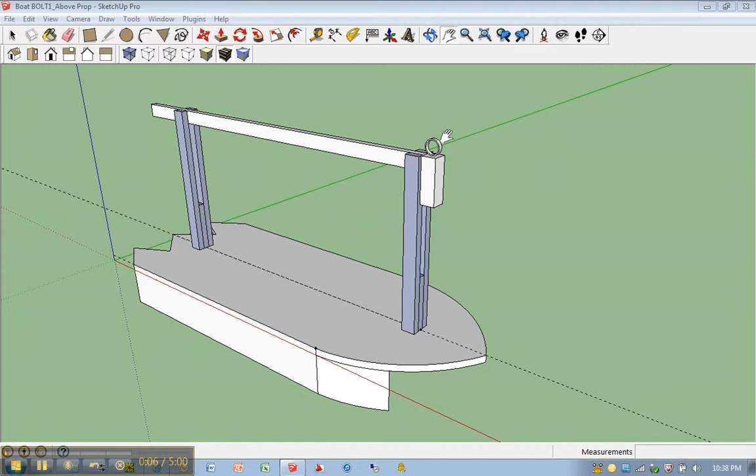Okay, we're going to go ahead and draw the tensioner and rubber band for an above water prop, which is typically one tensioner. So I'm going to go ahead and zoom into this eye hook. You might have to watch this video more than once to follow these first few steps. It's a little funny, a little tricky, but you'll figure it out.

Here we go. I'm going to hit L for line tool, and I'm going to hover along the inner or outer circle, doesn't matter. But I'm going to jump to the middle, find center, and click once.

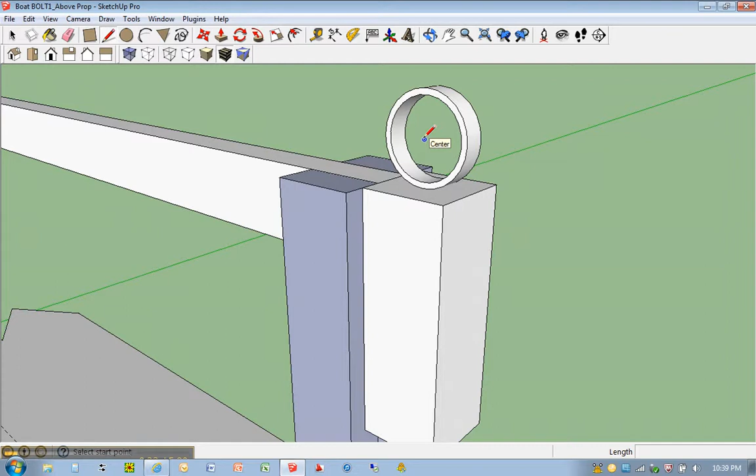Okay, I'm now going to move along the green axis, and I'm going to type in 1 over 16 and hit enter. I'm now going to move away along the green axis and type in 1 over 8.

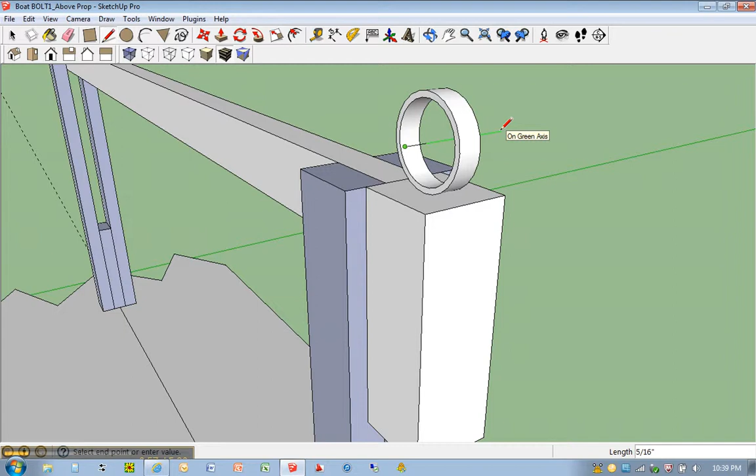Now one thing you'll find, I'll just change the orientation here, you can see that it's extending out this end, but it's lining up with the eye hook on this end. So we're actually going to now jump back to this side here. You can see I'm still connected, my line is still connected, and now this is a distance that you may have to sit and measure with a ruler to see how long your tensioner is.

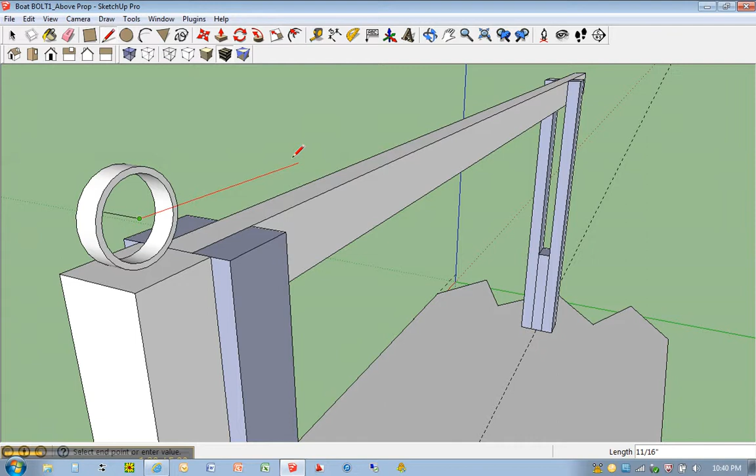Just for an example, I'm going to type in 2 inches. And then from this point, I'm now going to once again move along the green axis, and I'm going to type in 1 over 8.

And then I'm going to come in this direction. Once again, you can probably sit there and measure it with your ruler. I know on some I've seen them about a half inch, some more, some less. I'm going to just type in 1 over 2 here.

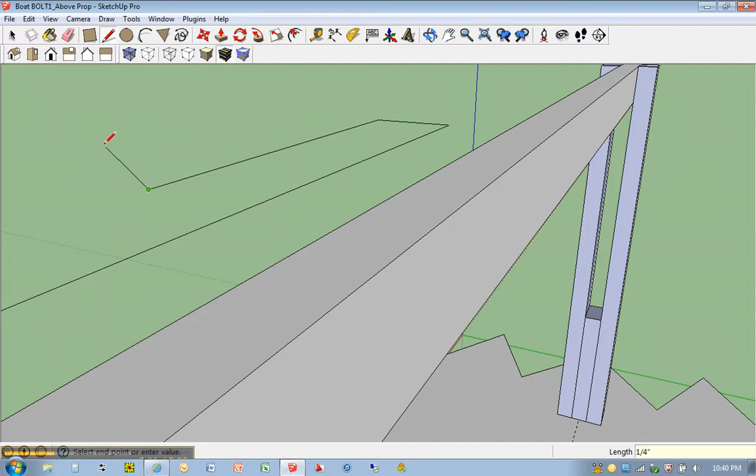Now I'm going to get out of line tool. You can see I'm still connected by hitting the escape key. Now the last line I made was about a half inch. So let me go back to the other side of this.

I'm going to hit L for line. I'm going to click here. Once again, I'm going to move in this direction. Now once again, you may have to measure this to see what you have. I'm going to go ahead and type in 1 over 2 again. Now, let me hit escape key.

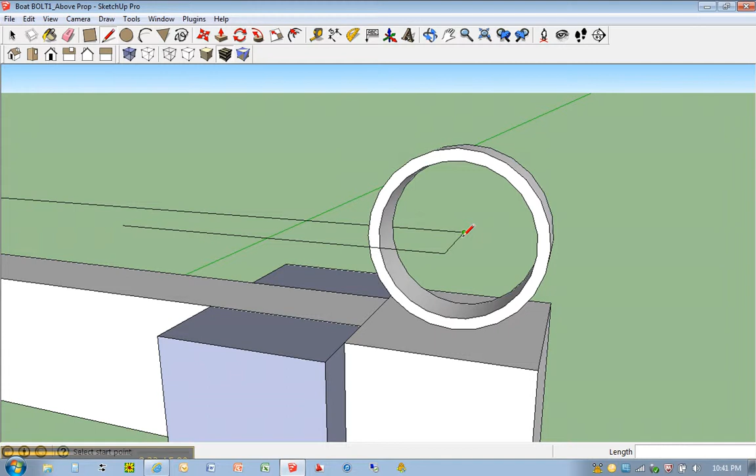The most important part of this whole process, the length here and the length here, that's something you can measure, is this thickness right here, or this length. This was 1/8 of an inch, 1 over 8. And here's why that's important. You can see there's my tensioner.

When I draw the rubber band, what makes this easy is I can go ahead and use this part of my tensioner to draw a flat 1/8 inch wide object, which in this case will be my rubber band. I could do this a few ways.

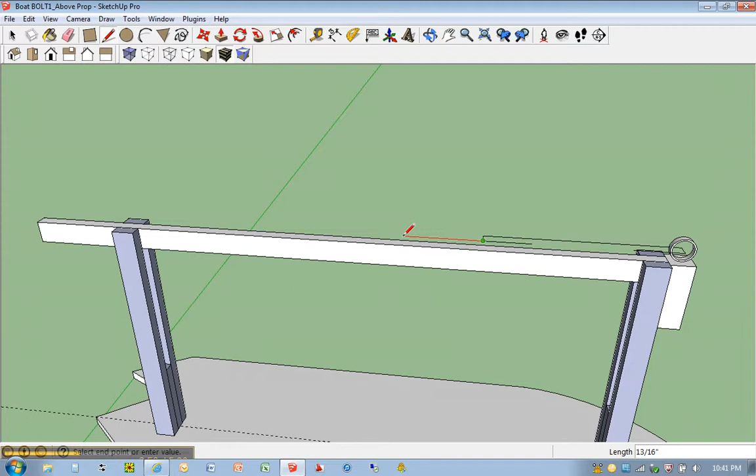I could use the line tool. I could click once here, and by measuring my rubber band, let's just say the rubber band stretched out typically ends somewhere back here. And I don't have my propulsion system on yet, but I eventually will. We'll just say the rubber band is 4½ inches in length.

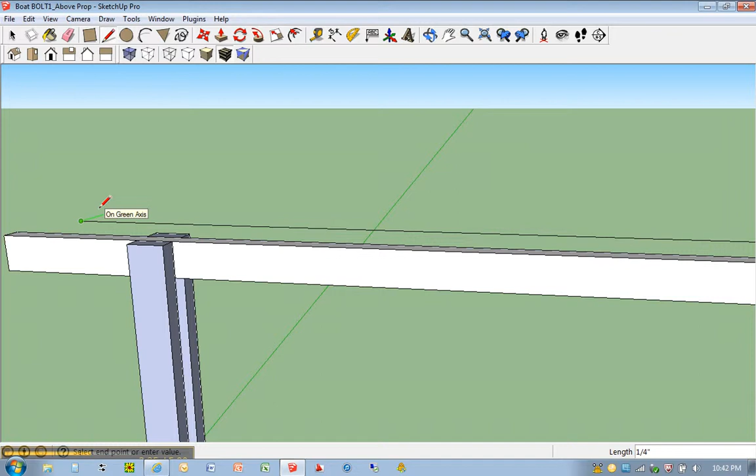Okay, once again, we said it's 1/8 of an inch in this direction. So I'm going to look for that green axis, and type in 1 over 8. That's how thick the rubber band is. And then I'm going to come back, look for the other side of that tensioner, and you'll just notice I get a flat rectangular shape. Okay, we're going to say that's the rubber band.

Now once again, haven't drawn the propulsion system yet, so it may be something that you add later. If I just add a little bit of thickness to this rubber band, I'm going to hit P for push pull. And I'm actually going to push pull it up 1 over 32, enter.

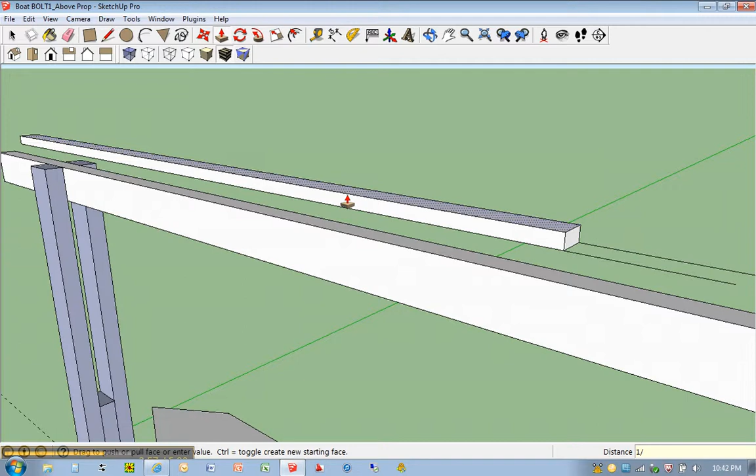And I'm also going to push pull it in this direction, 1 over 32. Okay, we just have something with a little bit more thickness to it.

So let me zoom out here, give you a better idea as to what this rubber band is going to look like. And there's my tensioner. Once again, this might be a piece you add later. You could draw the tensioner now, add the propulsion system, and then figure out how this tensioner is going to connect to your propulsion system.

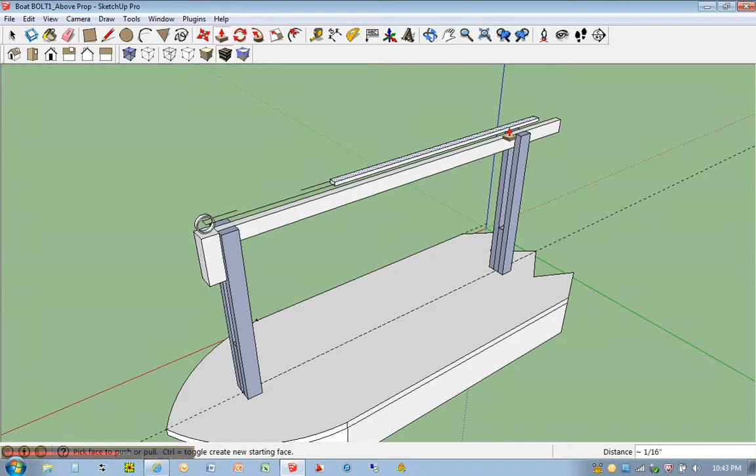Okay, you may have to watch this video again to go through those steps, but once again, the most critical part is this here. This is 1/8 of an inch, 1 over 8. Go ahead and save your work, and move on to possibly your last video.